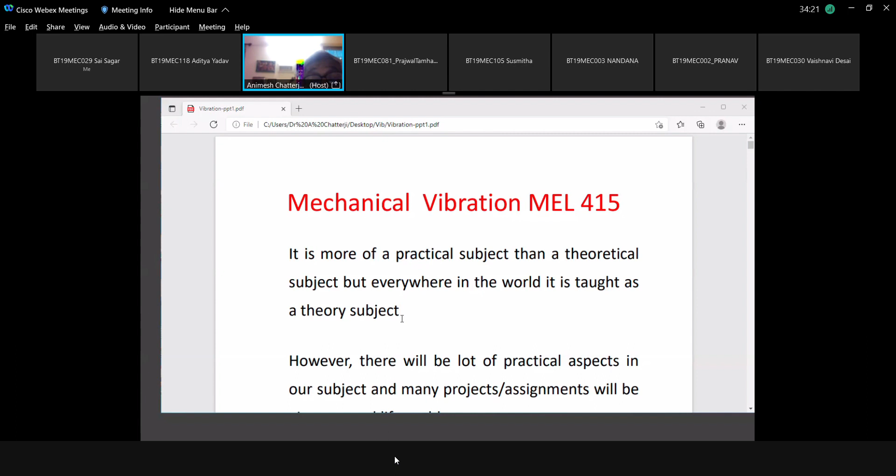So can anyone tell me any real life example where vibration is visible or vibration is involved? Let me hear from you, your own real life experience. I mean, give me an example where vibration is visible. Is vibration good or bad?

If I ask you this question, see, always try to participate in answering. This will help you in training and placement. If you don't know how to face a question, you will not get a job. So make it a habit of answering a question. Even if you don't know, try to answer. Is vibration good or bad?

So it can be either constructive or destructive. It can be used for good purpose as well as bad. Like in a condition where it is not required, it's bad.

Okay, Vinit, what is the good part? So like where it is being used as an application, like suppose when we use it somewhere in concrete, right? Like when we set up concrete pillars or something, that time we can use vibrations. Concrete compaction there. Okay, yeah, see, it's a good example. Don't try to answer in a vague way, you must use 'compaction' there. Agree?

Concrete compaction there. Similarly, when we have to demolish a building, concrete, we use a pneumatic hammer. Have you seen it, the pneumatic hammer? You will see people using a pneumatic hammer. So that is where vibration is used.

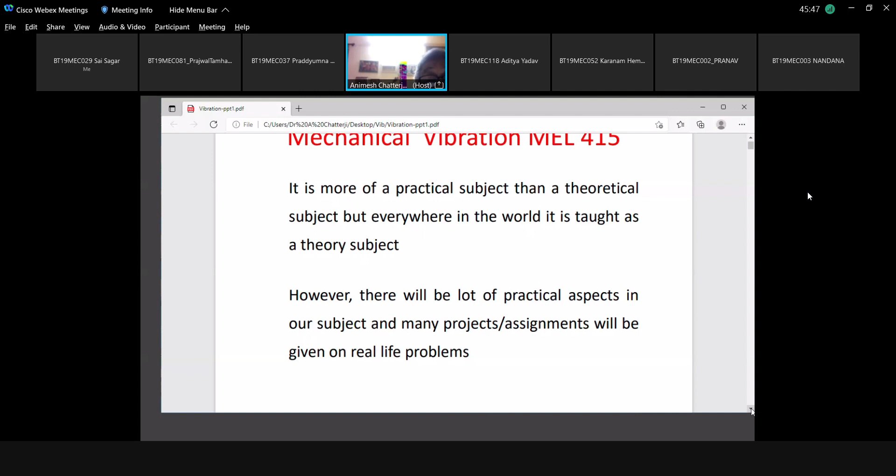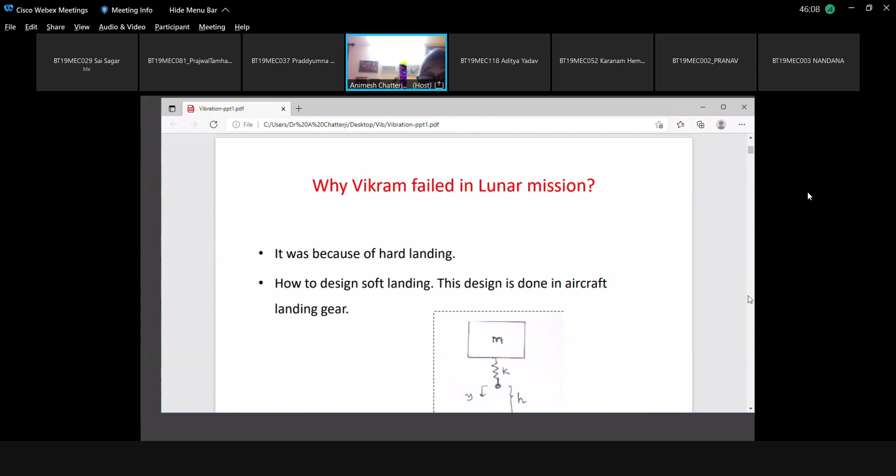Have you heard of this last year, or you forgot this? You know, Vikram, we tried to land Vikram on the lunar surface. We could not. This happened in 2019. Now, why could Vikram not land on the surface of the moon? Because we wanted to have a soft landing, but it had a hard landing. So, what is meant by soft landing, hard landing? This we will discuss in this subject, particularly with respect to aircraft landing on the runway.

So if you look into any YouTube video of the pilot sitting in the cockpit, you will see that the moment the plane touches the runway, the pilot's body vibrates. And those who have traveled in a plane as a passenger will agree that the moment a plane touches the runway, you feel the vibration. Why it happens and how we can minimize it, we will discuss in this subject. So in this subject, we will take up many real life cases. Landing of aircraft on the runway is an interesting thing. We'll discuss, but it will require a lot of mathematics.

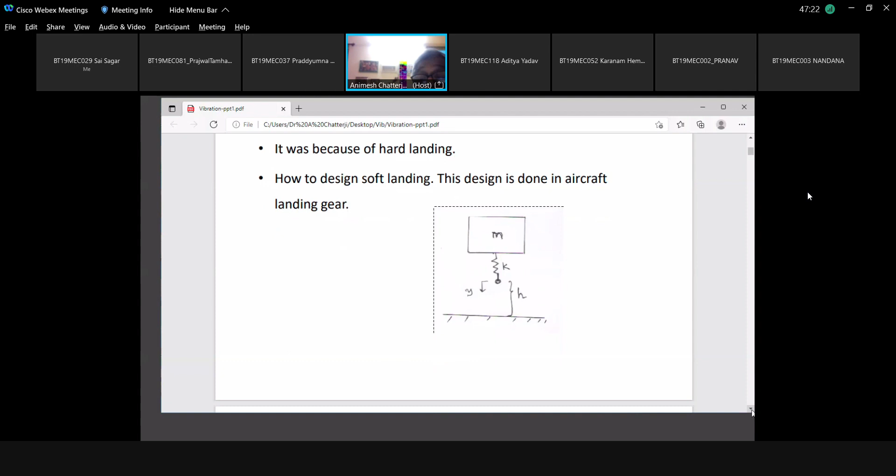So this is a typical industrial problem where we see that the supporting structure has a lot of vibration. Then either we have to predict it or we have to correct it. How as an engineer we take the corrective step, we will discuss in this subject. So this is another real life example in industry.

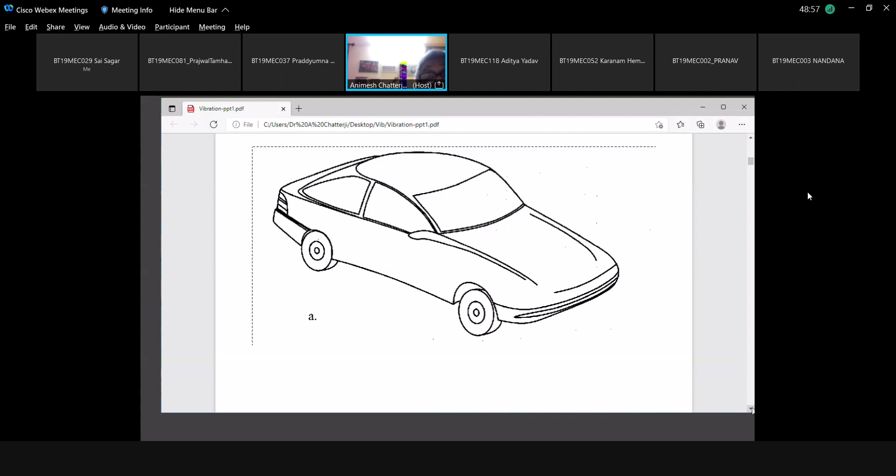This is quite usual. Whenever a car moves on a road, if you are sitting inside the car, you will agree that you feel vibration, particularly when the car is moving over a bump. Okay. So that also we will study, where we will model the car. This is the modeling, and finally we'll write down the equation of motion, which will be a little more complicated. But this is how the model of a car will look. Not so easy, not so easy.

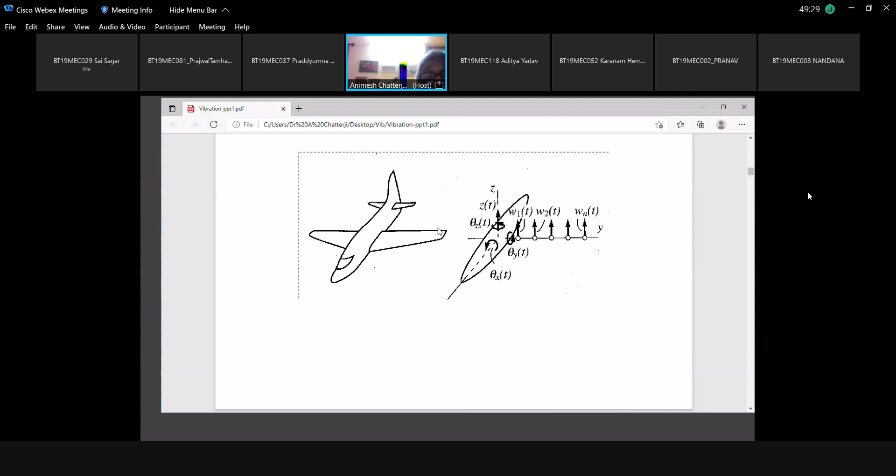This is how we model the wing of an aircraft, and there is an engine. How do we do the modeling so as to study the bending vibration of the aircraft wing? We will also discuss this in this subject.

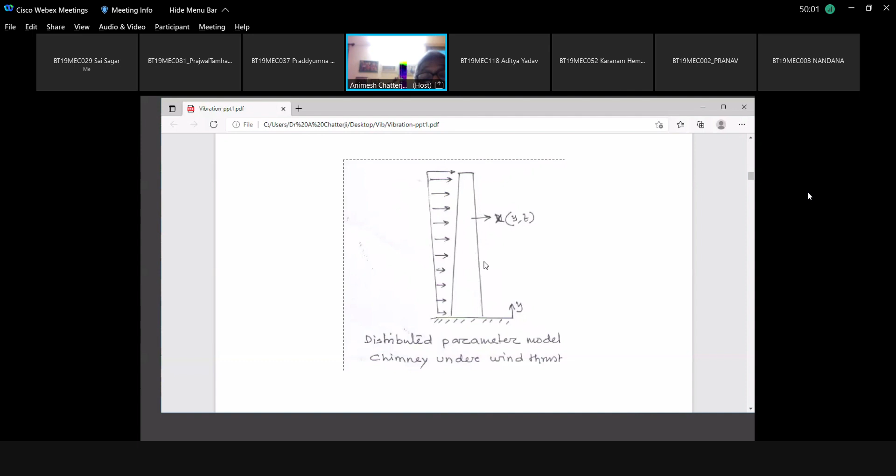This is the effect of wind on a tall chimney. So if suddenly a hurricane comes, and this is Vizag, you will agree that this is what happened in Vizag: whenever a hurricane comes, the air force acts on tall structures. It may be a chimney, it may be a high-rise building. So how the chimney vibrates, how the high-rise building vibrates, we'll discuss that.

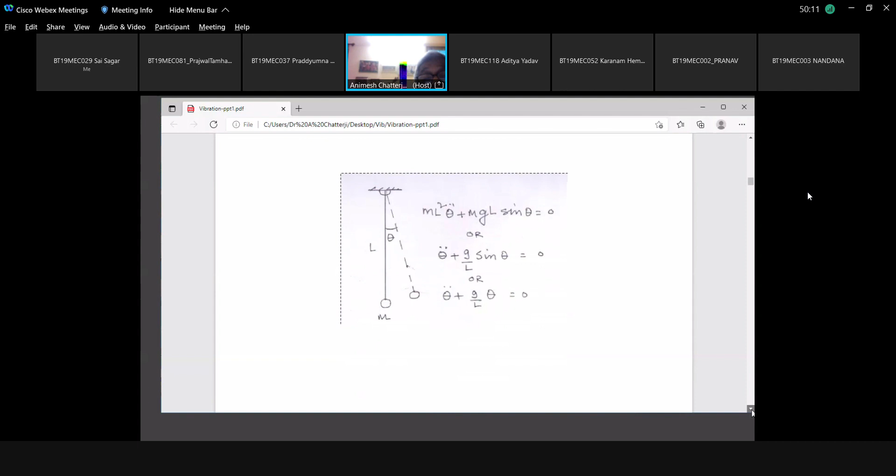This is a theoretical one, but are you familiar with this? Have a look at it.

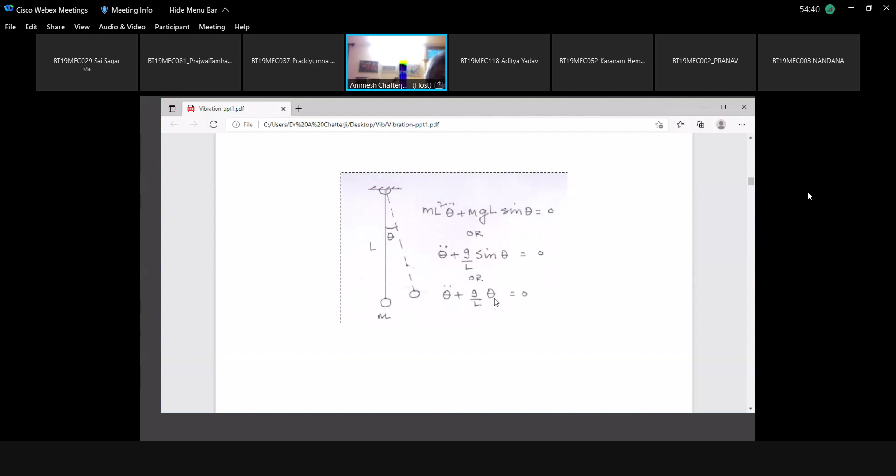However, in third year, every time we face a nonlinear term, we simplify it into linear, because solving a linear differential equation is easy. Remember, in your first year you were taught how to solve differential equations, but they are all linear differential equations, not nonlinear. But in vibration, we come across nonlinear differential equations. It's very difficult, very challenging. But that is higher level vibration.

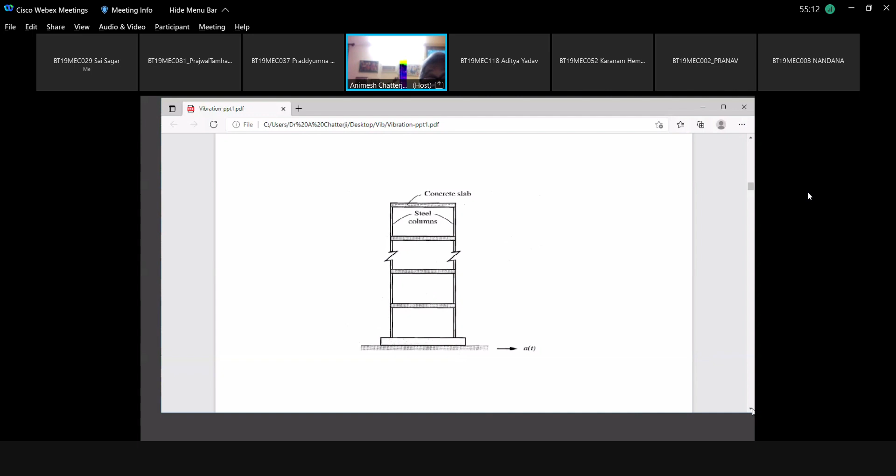So this is building vibration under earthquake. We'll discuss how the building vibrates when an earthquake comes. Some buildings collapse, some other buildings don't. Why does it happen that a small building survives, but a tall building collapses? So this earthquake effect on tall buildings we'll discuss in this subject.

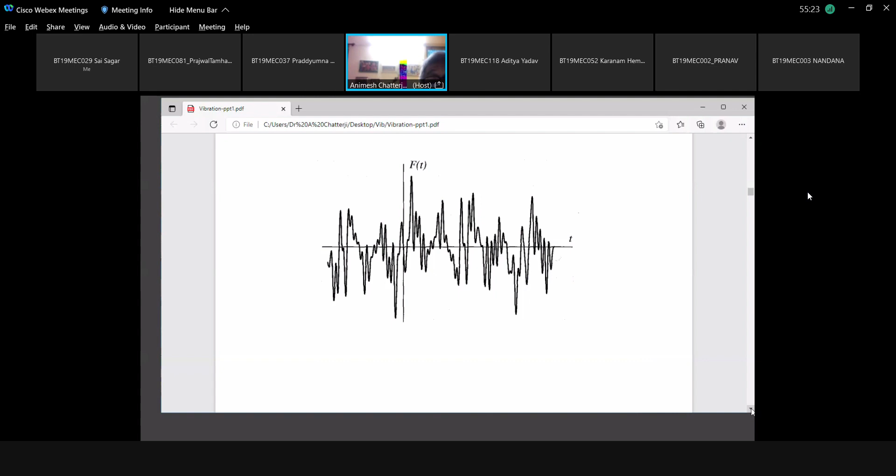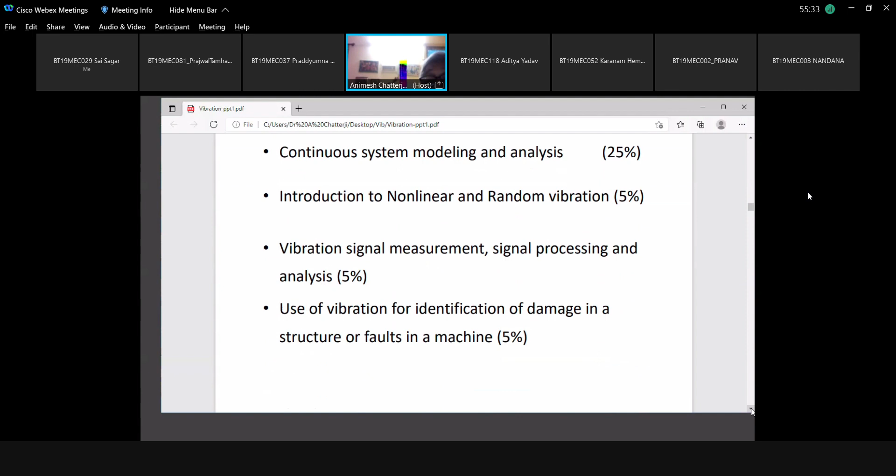So this is random vibration that comes because of earthquake. We'll discuss that. So a lot of things we will discuss. I'll give you the PPT where the syllabus will be shown. But what is most interesting is, I'll stop today's class, that generally I refer 15 to 20 textbooks. But you cannot afford to go through all the 15 or 20 textbooks.

This is the minimum list that you can go through. I'll give you the PPT. All the textbooks are very, very good and very, very important. So during the subject, today I may refer this textbook, next day I may refer this. So I'll keep on referring almost every textbook. But this is the minimum.

I generally refer 10, 15 more textbooks. But as far as you are concerned, how many? 1, 2, 3, 4, 5, 6, 7, 8, 9, 10. 10 textbooks, try to get the e-copy if you can. The subject is dangerous, huh? I can give you another 10, but I think these 10 are good enough.

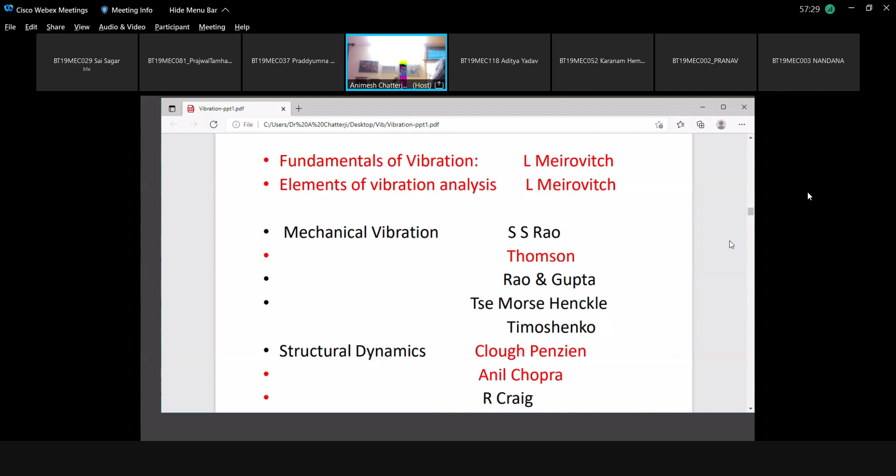This subject is the most important subject today. Why? Because whenever a failure occurs, starting from the big failure of Vikram, anything, most of the failures occur because of vibration. So this subject is very, very important, at least for mechanical engineering. Unfortunately, mechanical engineering students don't like this subject. So if you don't take this subject, you should not call yourself a mechanical engineer. As simple as that.

Anyway, any question? We have only 2-3 minutes. That's all for today. I have given some basic introduction.

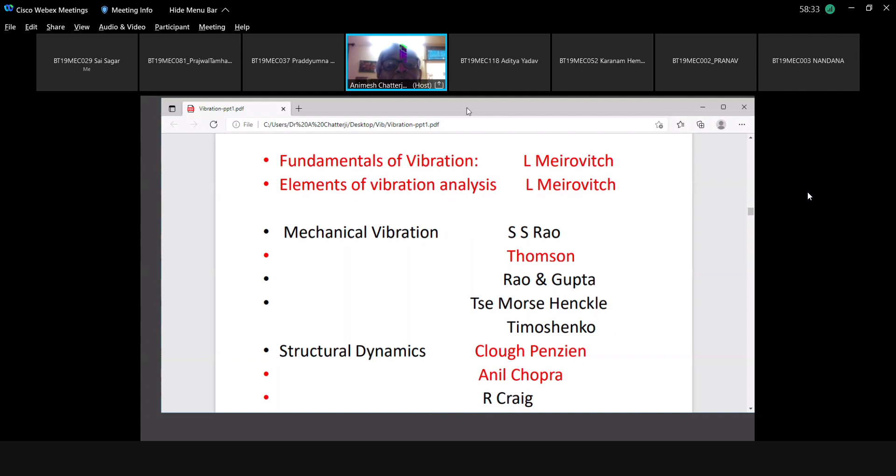So the additional students who have joined there, they belong to renewable energy. Am I correct? No answer. Yes, sir. So tomorrow you will not be able to attend this lecture. Fine. But still, if you are interested, let me get a tentative number through Aditya.

Does anyone want to ask anything about the subject? In this subject, we have almost world-class instrumentation in our lab. So had you been on campus, you could have done a lot of practical experiments in the lab. Unfortunately, online we cannot, but we have world-class vibration instruments in our lab. So if you happen to come back to campus later on, you can do a lot of experiments yourself. I generally also introduce LabVIEW, which is another beautiful software in the world today.